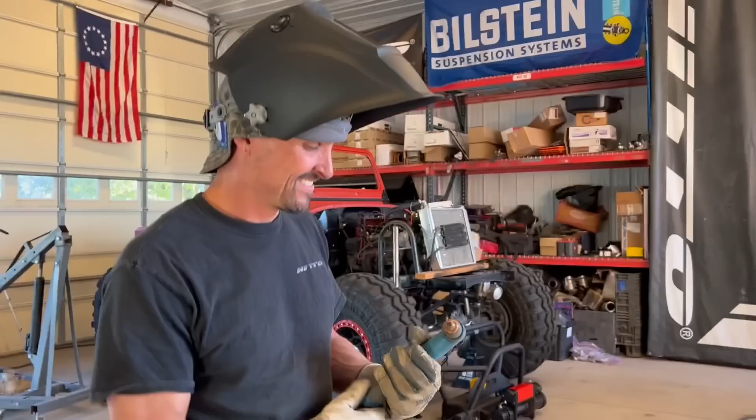Say hello. Hi, I'm letting him use the plasma cutter for once. I get to play with this toy. All right, ready? Here we go. See what you got. Under pressure. How did I do, Coach? I'll give you an A-. Because you didn't put your welding jacket on.

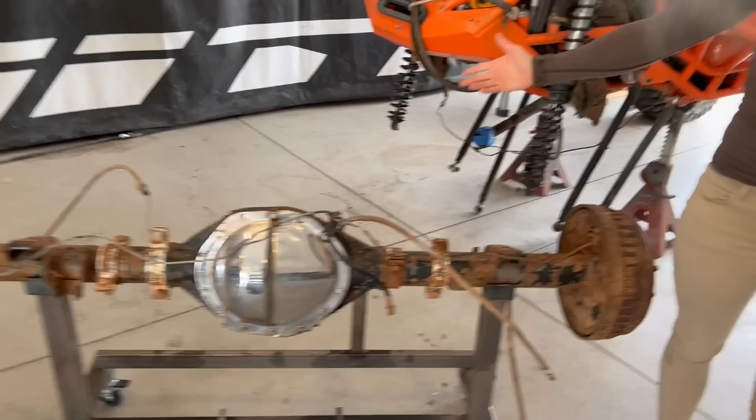Yeah, we were just supposed to fix the axles up a little bit, and we got into it, opened up the front axle, and the gears were in pretty rough shape. Like the teeth were chipped, and then we opened up the rear and it was full of mud, and we were just like, you know what? Let's just find some different ones. So Chris did his research, and we picked these up really close by, got a really good deal on them. The plan is to completely clean these up, put a truss on them, and make them look beautiful, throw them under the pebble bouncer.

One of the things John wanted to do is simplify this dash. All the old switches and the light switches, all the old stuff, we're gonna get rid of. Because I hate wiring but I'm really good at it, we're gonna do a Switch Pros, turning all of these switches into one Switch Pro. We're gonna clean up the dash, move some things around, put some of the gauges back in the middle. We're just gonna make this a lot cleaner and easier to use. So that's one of the things we're gonna get doing, and clean up all the wiring in here.

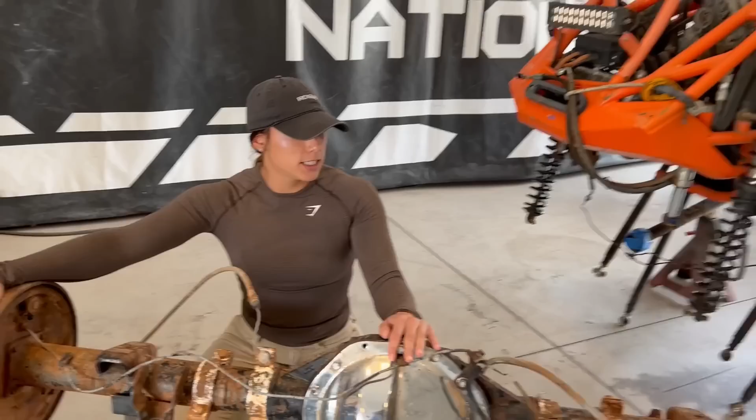While Chris is working on the CJ, I'm going to be tackling the pebble bouncer. Before, he had 1/4 ton axles, and those axles came with all these spacers, and it was one of the reasons he brought it to us, because we never want to see those again. Good news is, we did get the 1 tons, and they are 8 lug. What I'm gonna do next is cut all of these brackets off, completely clean it up, and get it ready for the Barnes 4-wheel drive truss kit.

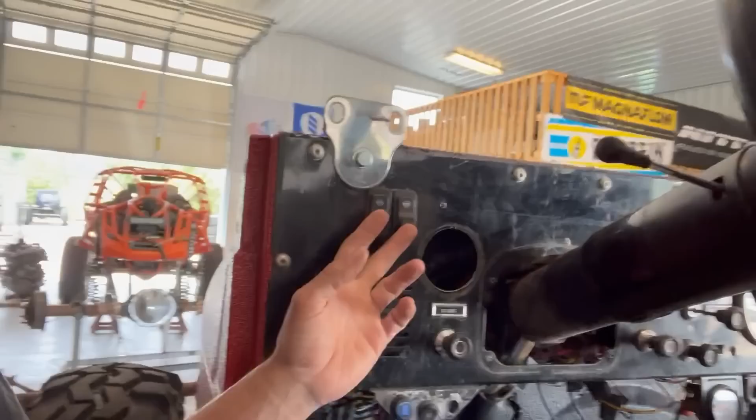So while we mock up this dash, I'm gonna cut it out of aluminum. We're gonna lose this dash. We are going to take the ARBs and put it in the Switch Pros, the lights put in the Switch Pro. I don't know what these are for, I'm pretty sure these are the bumper lights, which will be in the Switch Pro. All of the heat and AC controls, which we will upgrade also, we will be putting an AC system in here.

I'm not sure which one yet, I'm still trying to figure out which one will fit, so I'm still doing a little bit of research. But anyway, that'll fit inside the dash, so I'm not really worried about that part. The radio, we need to put a radio in there. We're gonna move all 3 of these gauges and put them next to each other like they're supposed to be, so that you can see everything all together. So the first thing we're gonna do is get this dash out and disconnected and see how bad the wiring is back there.

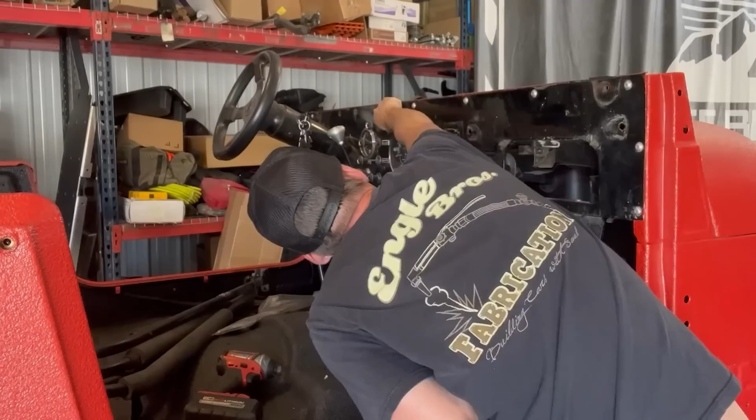Everybody out in the world, stop messing around. So I'm tearing this dash apart.

It's a nightmare, so we're tracking some stuff down. I do know that all of the ARB stuff, which is now down here, all of that will come out because that's all gonna go to the Switch Pros now, so that's cool. I have a black wire that I think is a positive wire, so that's cool.

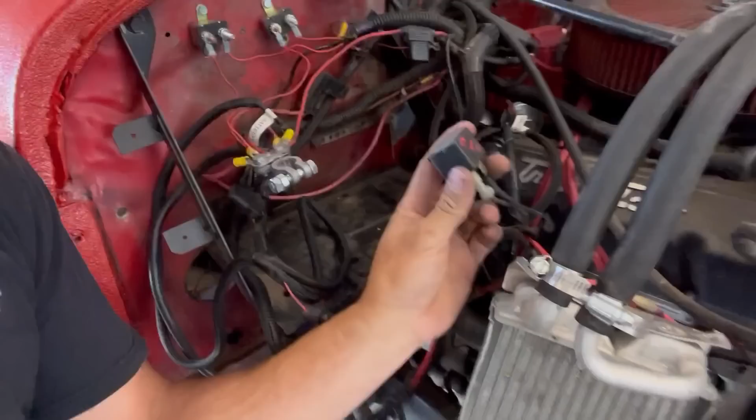We're finding some more stuff, so we're just gonna yank all this stuff out. On the passenger side, where all the battery stuff is, all of this is gonna go, so we're gonna try and decipher where all of it came from. I do know, and then this little guy, there's like this floating relay. It says fan, but let's find out.

So we're gonna rewire the fan, rewire all of the ARB stuff, get rid of all the relays and all this stuff because, you know, Switch Pros can handle all that by itself. So then I'm gonna take all this wiring out.

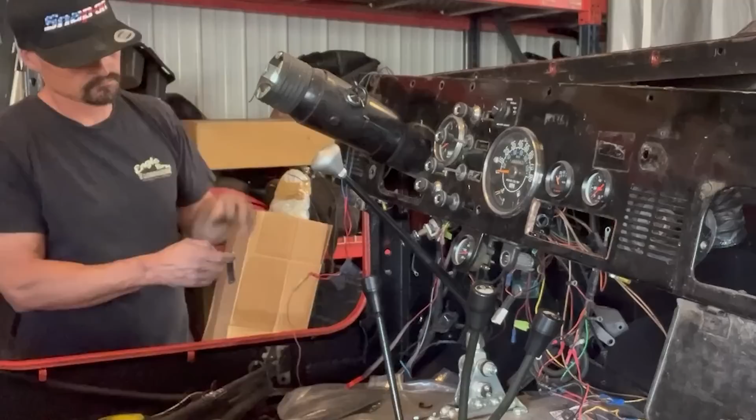All right, as you can see, we got it out. I took the old heater box out because we're not gonna use that. So now I just have to decipher all of that mess and clean it up, because there's a lot of stuff in there we don't need.

I'm gonna redo these speaker lines, so half of this will be gone. This is the old resistor for the fan resistor thingy-majigger, so all that wiring is gone, don't need any of that. All the lights and stuff for the old gauges, this can all go because I'm not going to use that.

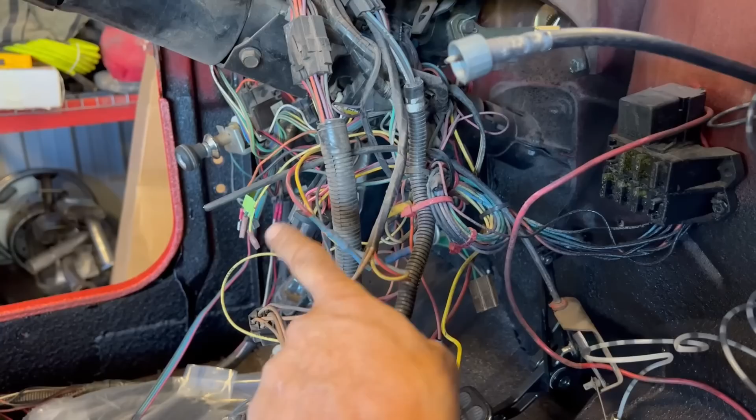I think I'm going to convert this to an electric or electronic oil temp sensor or oil pressure sensor. That we got to clean up, they kind of oversprayed onto that guy. Some of this is going to go away, so now I just got to go through there and figure out what everything is.

Also, we got all of the relays off of the firewall in here. This is the only cable that needs to run across here. I just need to loom this up and clean all this up.

I got rid of that big cable that came across here because all the ARB stuff is now out of here, since it'll go straight into the Switch Pros. We're gonna shorten all this stuff up. These are for, I don't know, the O2 sensors or something because this is injected. Reloom it, clean up the top of this engine bay, redo some of these.

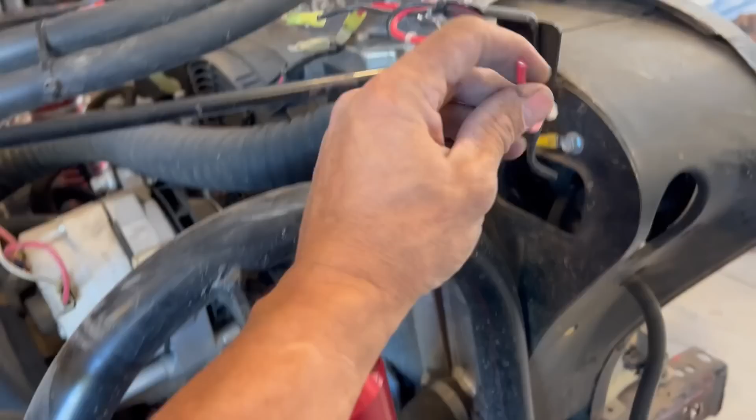I gotta redo the fan because the fan, that's what that one relay was, and it was burned, so they were having to jump the fan. So we'll have to put a real fan in there, and that is also controlled by that guy right there, so we'll have to get a new relay and stuff wired into that and get that fan running.

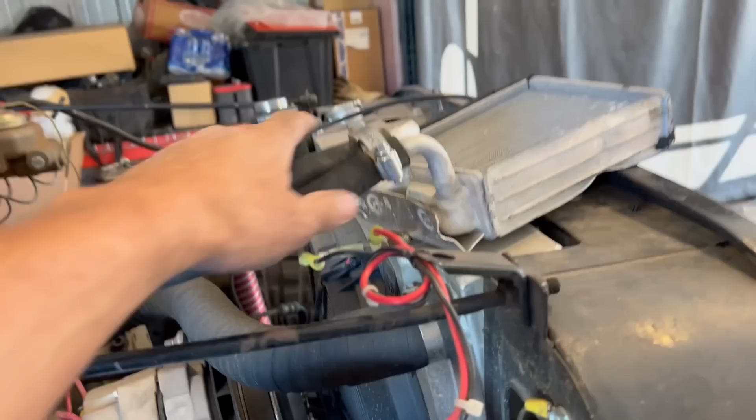This is gonna go to the new AC box that'll be in the firewall when we get it, but for now they just ran it like this because I don't know why, but hey, it works.

I was trying to take these nuts off, and as you can see, all of them are pretty mushroomed, like someone took a hammer to them. And like when this one was coming off, it was completely taking off the metal. And this one, I can't even get off right now. So what I'm gonna do is take the finger grinder and just clean up the edges and hope that it'll come right off afterwards.

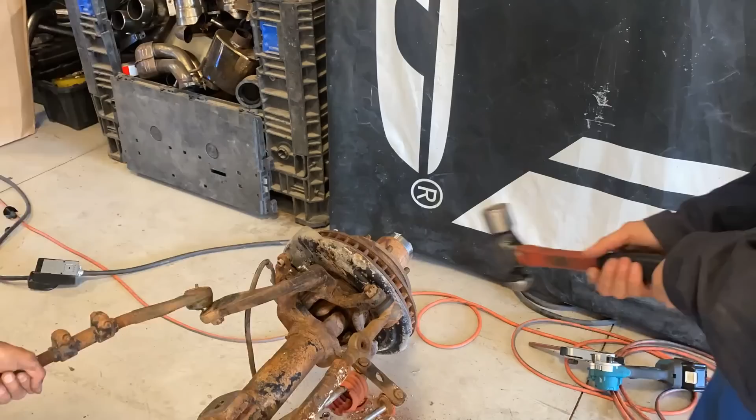After I was done going through that wiring, we took everything off of here that was important, and I'm starting to transfer it out into a layout of the new dash. Had to move some stuff over because stuff didn't fit in some spots, but this is what we're gonna pretty much end up with.

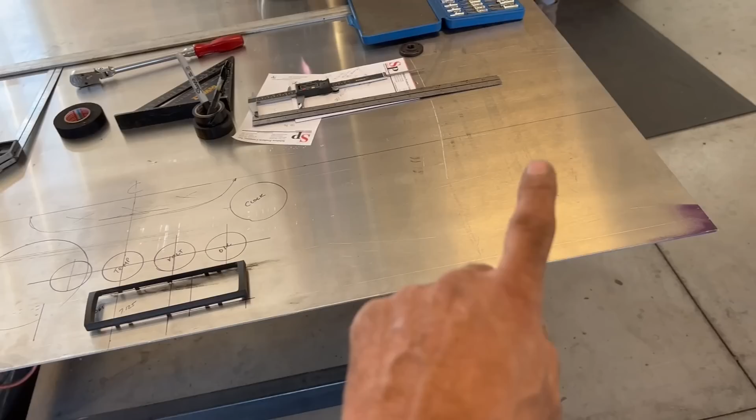We're gonna put a speaker over here. Glove box will be gone, we really don't want the glove box in here anymore.

There'll be a speaker here. I still gotta put turn signal LEDs in here.

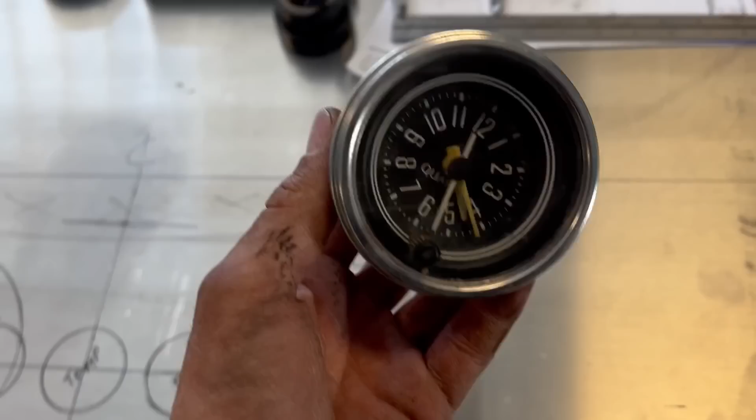This is the original cluster. Maybe, I don't know if we're gonna get rid of that because now we don't need all the gauges that were in it. I don't know yet. The tach, temp, volts, oil, and surprisingly enough, I got the original quartz clock and it actually works. Believe it or not, it works. I don't know how accurate it's gonna be over time, but it does work. And I'm gonna stick that back in the dash because that's pretty rad.

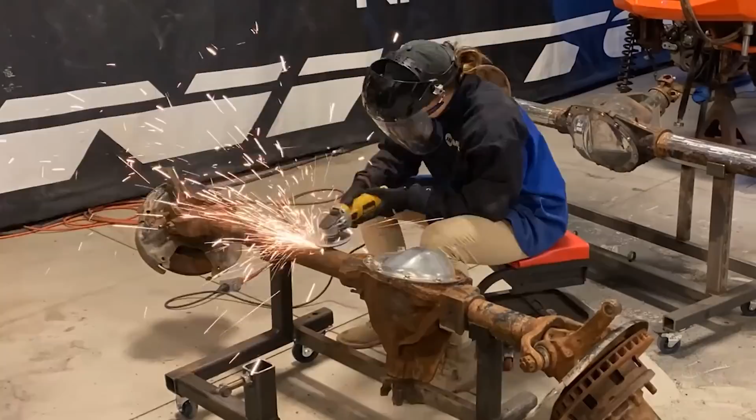So I did take the grill off because it is going to be painted in the same bullet liner color. And today we're just gonna start sticking on what we do have. I think we have a window frame, a tailgate, the rocker protectors slash rock sliders, and the rear bumper. So that's what we're gonna try to get on today.

Before we put the tailgate on, we wanted to touch up some of these miscellaneous brackets and make them look a little bit better. And John didn't want these to be silver anymore, so we're going black.

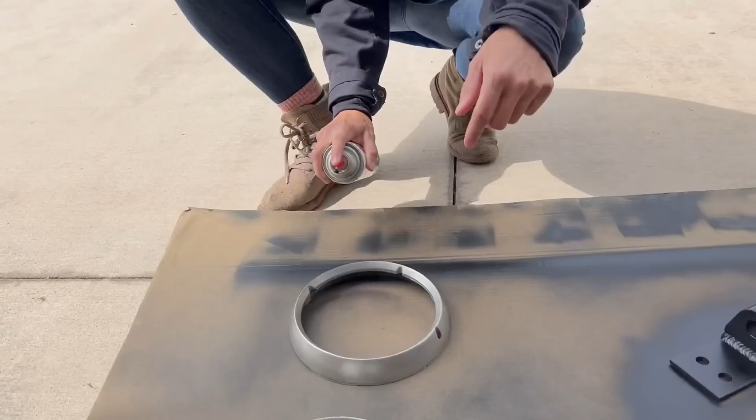Beck is a professional painter. She's really good at it. And I like it. What's funny is, growing up, my dad always had a joke that if we ever needed a job living out in the country, the horse farms, we could just paint the fences.

Worst came to worst. John also wanted to polish this tank up, so I'm gonna clean this tank real quick. Clean the overspray and the dirt and the years of grime and stuff on it, and probably hit it with the buffer real quick and see what happens. I don't want to make it too shiny. We'll just see what happens.

There's a lot of grit and dirt and grime on this from over the years. So I'm just gonna Scotch-Brite it, hit it with some acetone, and see if we can get this thing to polish up a little bit.

So Beck and I got pretty far on the CJ. Now we're gonna shift gears because we're waiting on some parts for the CJ. We're gonna shift gears back onto the bouncer. So we got a little bit of work to do on the bouncer. That's what we're gonna do now.

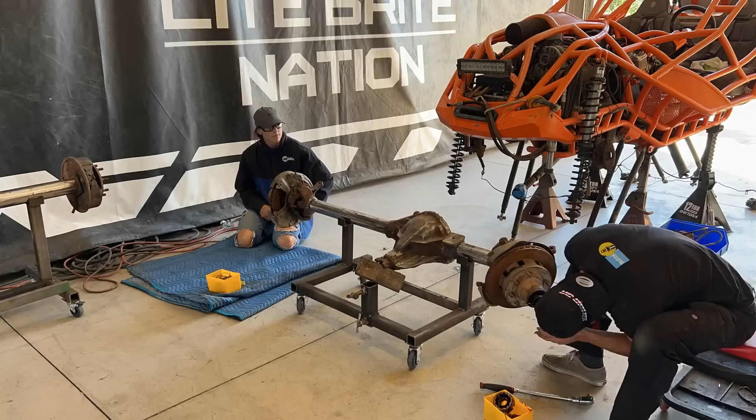Now we replace some ball joints.

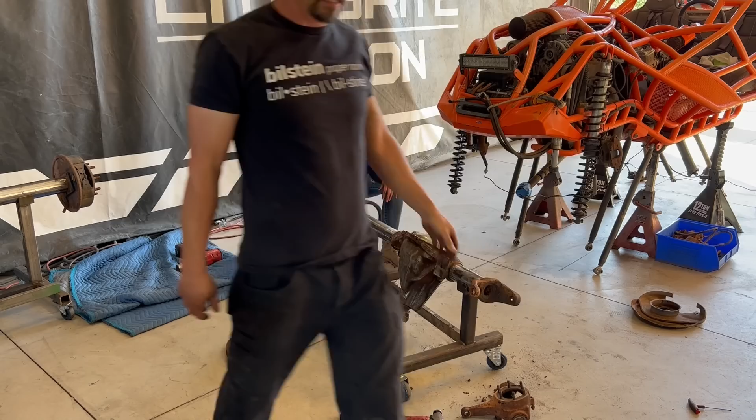Last night I got these parts sandblasted, and today I'm going to primer them and paint them. And while Beck gets those parts all painted up, I'm gonna strip this firewall back so that we can paint this firewall, because let's be honest, it looks pretty bad.

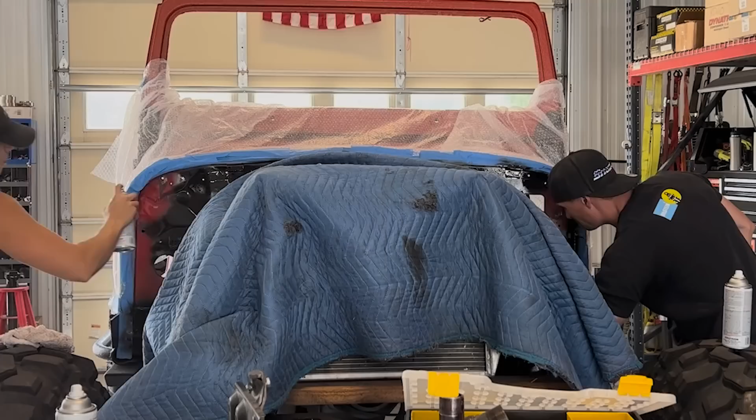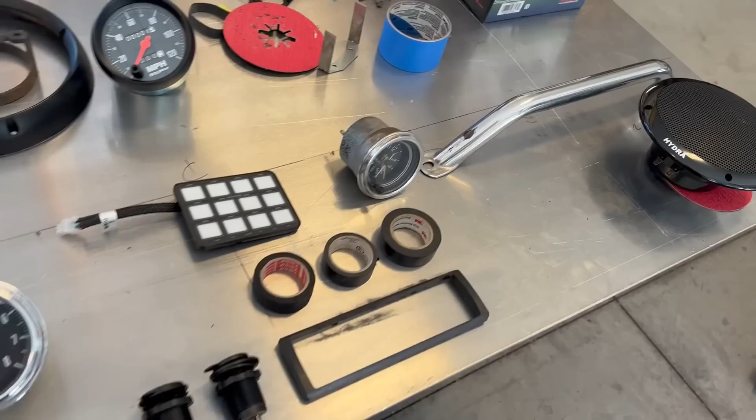So here's the new dash layout of the CJ. I got them new speakers. These are marine Pyles - I know they're not super high end, but they are waterproof so we can put these in the dash without having to worry about having the top on them. They can get wet, and they've got a nice screen on them. That's all I really wanted.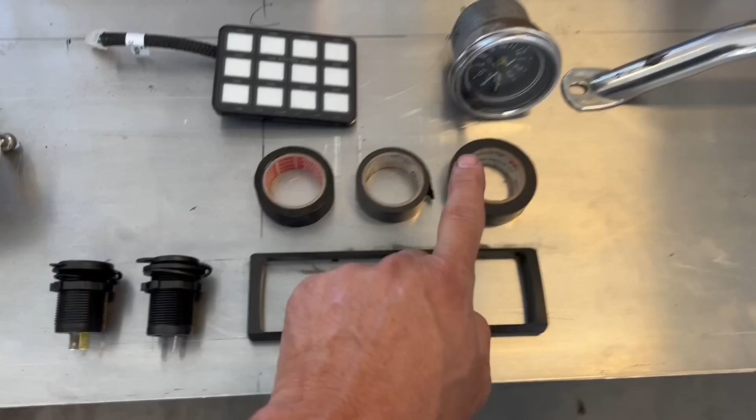We're gonna put 4 gauges across here, not 3, because I needed a fuel gauge, so there'll be a fuel gauge here. Speedometer, which just came in, it's an Auto Meter, so we'll put a speedometer here. I have a new RPM gauge coming, it's the same series as this so it'll match. Actually, all these gauges will all match - they're all the Z series from Auto Meter.

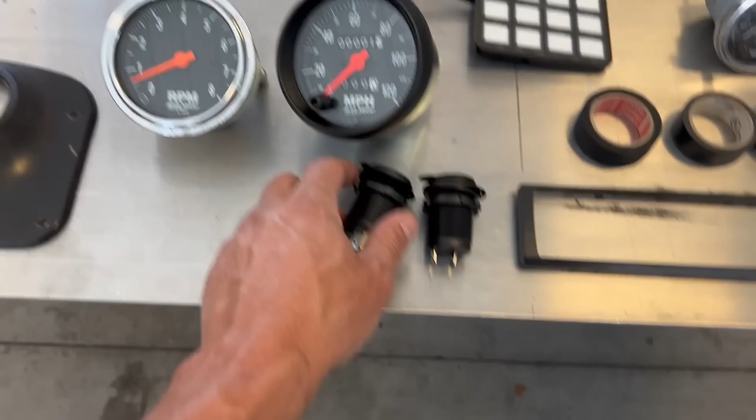Kevin's making noise, haha. I got these two - I got a USB, the 3.0 USB, so it'll be a quick charge. So I have that, and then I have a regular input, auxiliary power for whatever else he wants to run, steering column, and then one more speaker will go right here. And then we'll cut this whole thing out and get it all bent up.

Switch pros, 12 button switch pros will go somewhere in this vicinity. And an original quartz clock out of this CJ - I'm gonna throw this nice vintage piece back in here and make it work because I think it's sick.

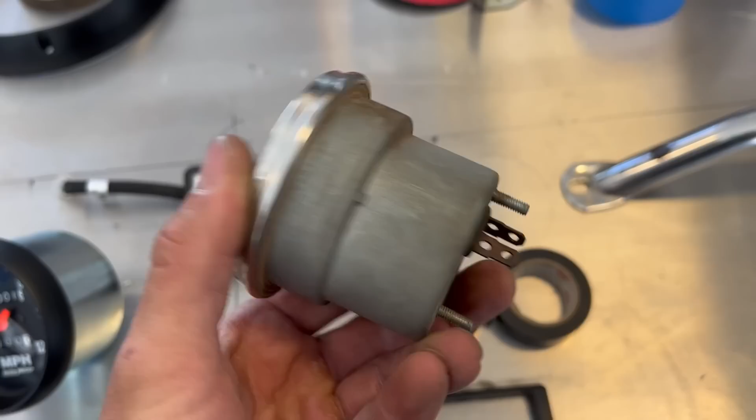So I'm gonna get to plotting one more time and actually get some lines drawn out and some circles and stuff. The grab handle, this factory grab handle in here. So yeah, let me get to cutting.

Back to getting everything prepped for paint. There's a couple of things we're gonna paint orange.

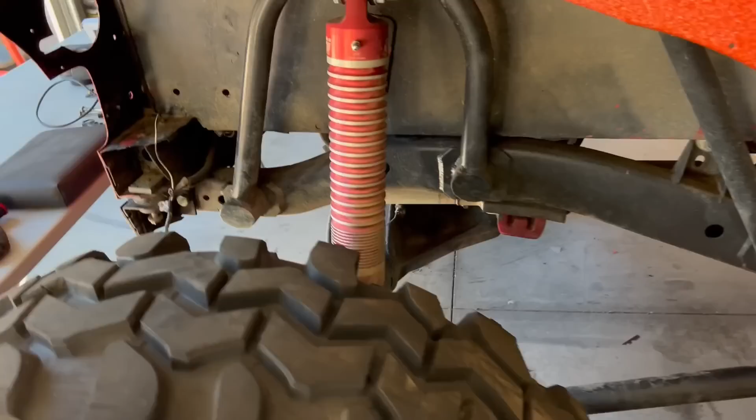We're gonna paint the center armrest console. He wants the ORIs painted orange, so we'll take these off, scuff them up, and paint them orange. Bead lock rings will be orange, the cage that holds the tank down will be orange. Touch up the links, then black seats, orange belts, and the orange cage on it. That'll be pretty sweet.

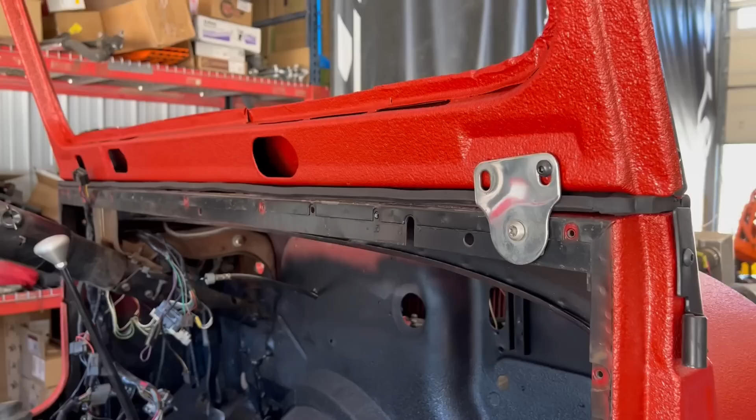The dash will be black with all new layout, and a bunch of black hardware. This thing should be pretty sweet.

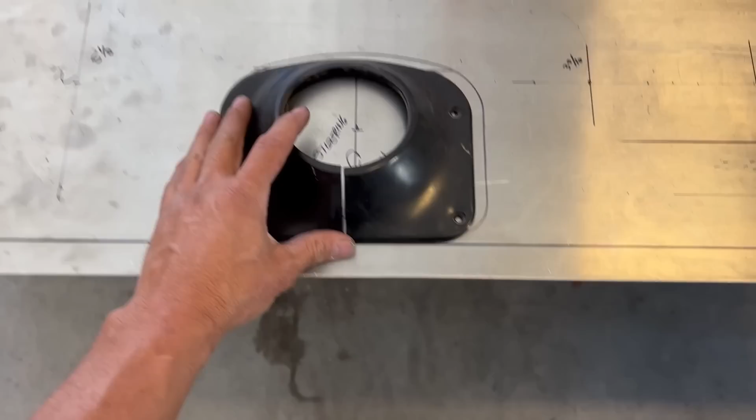All right, so we got everything laid out. We're gonna have the speaker right here. I need a 5 1/8 hole centered from here, I need to cut this guy out. The steering wheel trim and steering column trim will fit around it. I have 2 gauges, RPM and speed, both 3 5/16 hole saws.

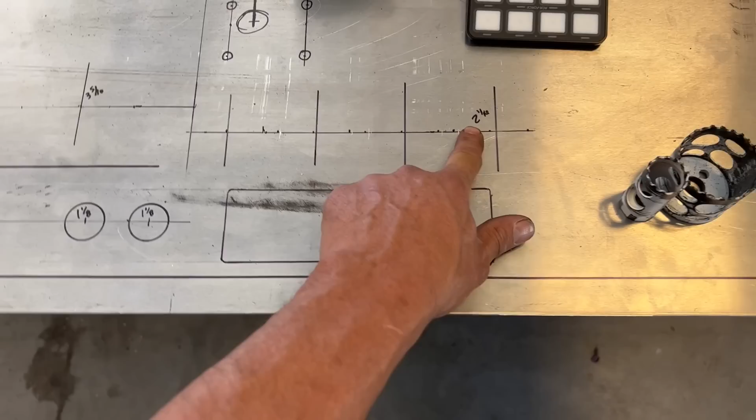Beck actually just ran up to the hardware store to get me this hole saw because I don't have one. I do have these, these are 1 1/8, for the 2 USB and auxiliary power, and then 4 of the same gauges, 2 1/16 for fuel, volt, oil pressure, water temp, or probably not in that order, but you get it. So that guy goes right there.

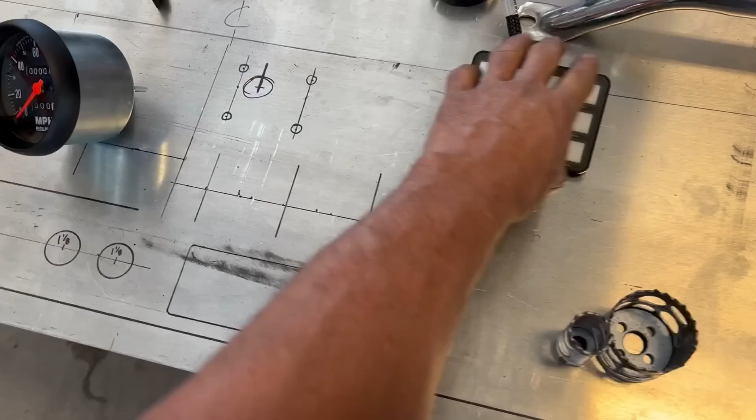This is for the switch pros, so this guy will go right here, almost to dead center. This is the center of the dash, and that's as close as I can get it to center. So we're gonna go right there. This will be the radio.

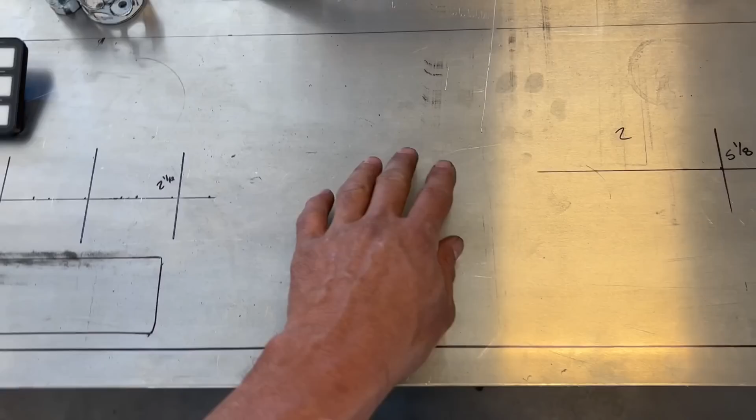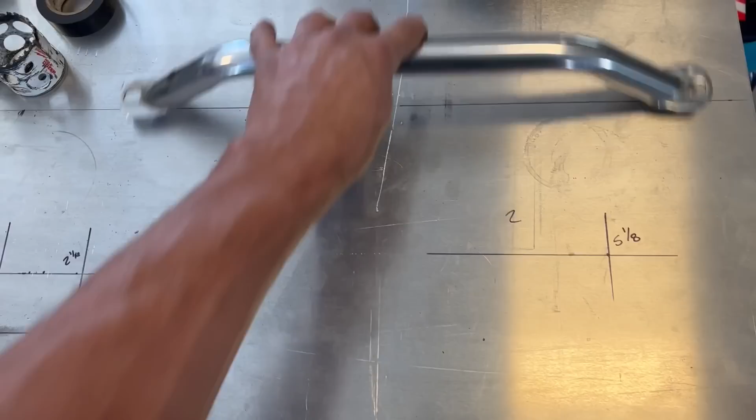The other speaker, we'll probably put some sort of pocket here, but I won't put it in the dash. I don't think I'm gonna put an actual glove box back in it. I think what I might do is a MOLLE pack or something like that, so I might cut something here so you can hang a MOLLE pack on it. But this is gonna be the one speaker, and I haven't quite figured out exactly where I want this to go. It's probably gonna go up here somewhere, the grab handle. And that's it.

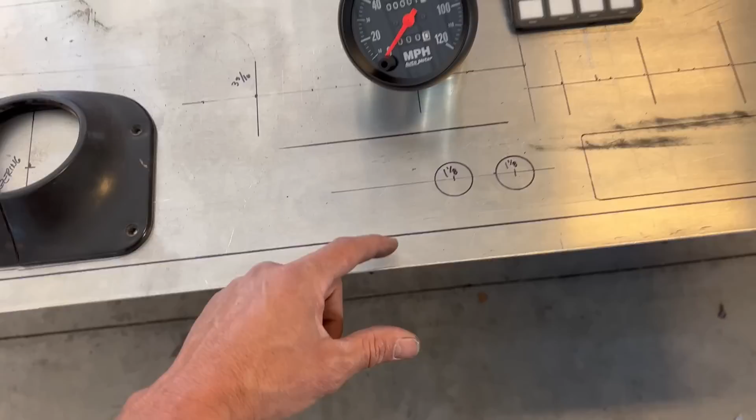And then in the future, I don't know what we're gonna put here. I was gonna put AC here, but we are gonna go with an under dash unit and not an in-dash unit because I don't quite have the space, if the gauges and everything are in here, to run a behind the dash full AC unit. So I'm gonna run an under dash, and we have a lot of room under the dash, so that's what we'll probably run with. I think it'll look great.

Everything's black because he wanted a black face and black rings, so I had to order all new gauges, and this is what we came up with. We do wanna do something with this, he doesn't like the chrome. Maybe we'll powder coat it or something, because that's the only piece of chrome on the inside. But for now, we're just gonna get this cut out.

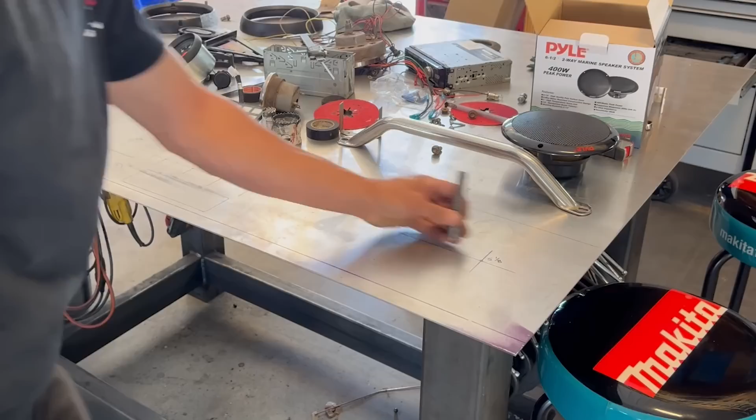So I know I've said it before, but wax will help cut aluminum.

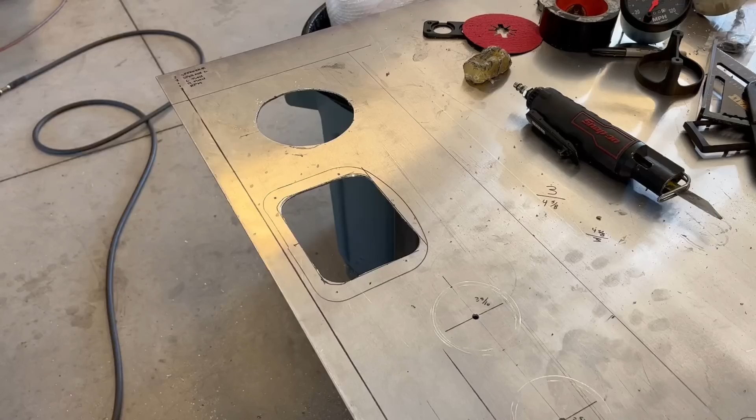Is he talking to you? Come here. Come here, Pecker. Come here, buddy. You saying thank you? Here. Here, one more. One more here. Well, he's got 2 over there.

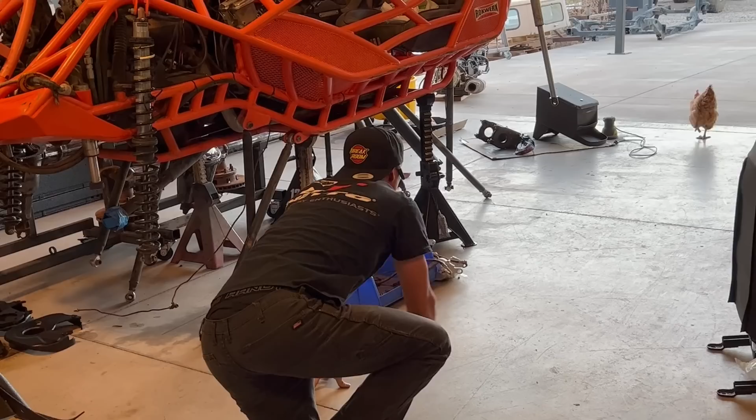So we got all the holes cut out. There's actually holes under here, yep, right there, bam, and they fit. So this is the top side, this is the face, this is the face of the dash.

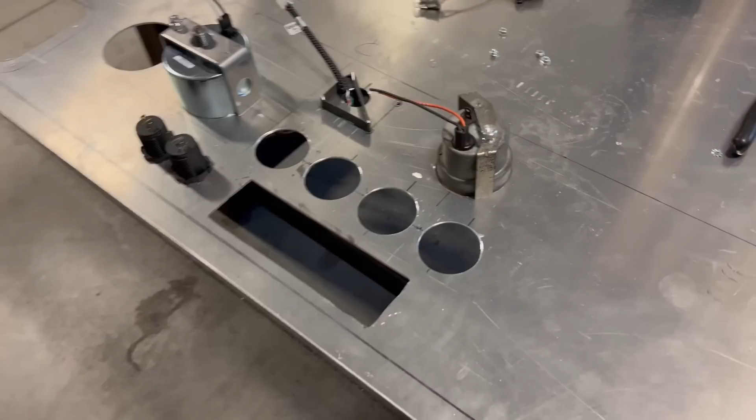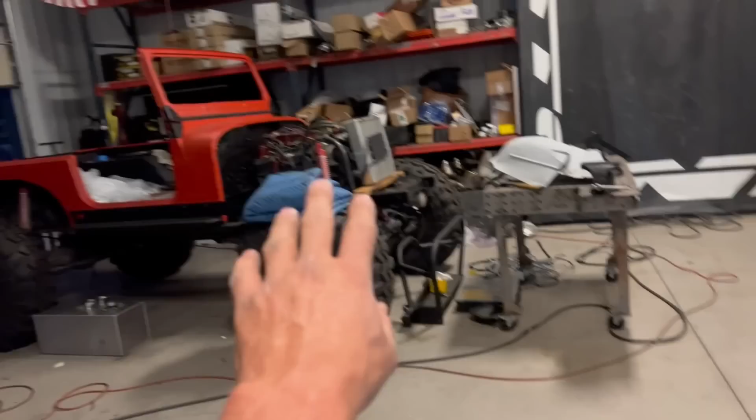But now it is time to wire all this up because I'm gonna do something a little different on this dash. Instead of everything having a plug and then having to plug it into the dash, what we're gonna do on this one is run all these accessories: a left and right speaker, all the power and grounds for all the lights, all the power to power everything except the radio because it has its own plug. But the USBs and everything, the speedometer, the RPM gauge, the tach wire and everything that comes out of that, and the speaker wires, because they're physically attached to this dash, we are going to run a harness. I'm going to create a harness that's going to pick up all of these, including turn signals.

There'll be a left and a right turn signal and a center warning light. This right here will plug into that, but this plug will be part of the dash. So this will come out of the dash here, come out of here, and then plug into the Jeep. So this will be one plug.

There'll be a second plug that'll have the speaker wires and everything else that's going to be an accessory on this dash, so you can install this dash and just plug it in. The reason I'm doing that is because we all know how hard it is to pull a dash. If you saw me pull this dash, I had to get under there and unplug every individual thing because it was tied to the Jeep, which makes removing the dash really hard.

I want to try to keep it really clean under the dash, so the dash will have its own harness over to the driver's side and then just plug in. I can run all of the harness under the driver's side and against the firewall, so there'll be no wires under there, except for the radio. The radio will have its own power and everything, but it sticks far enough in there, and you can just reach under there and unplug it. Easy. So let's get started.

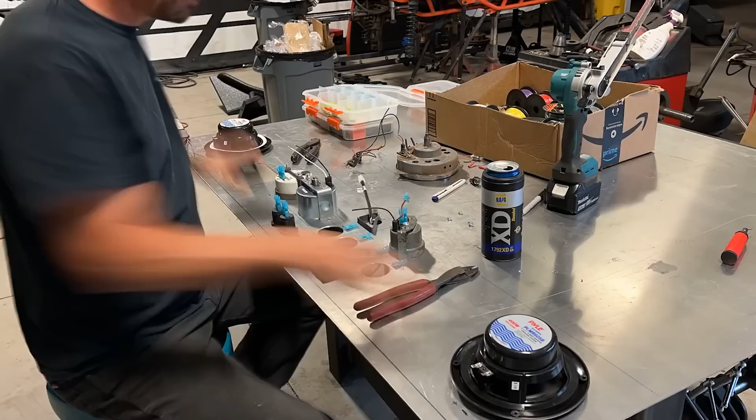All right, so as you can see, I have a couple of circuits already ran. I have Illum and all the grounds ran. I have a tach because it was already in there. But what I did is I am going to incorporate the radio into this harness because I already have power, I already have grounds, I already have ignition, and then the front two speakers.

The only thing that will not be in this is the two rear speakers, which I figure would be easier to put a connector here to run all the way over here for the two rear speakers. So that's what we're gonna do. That way we don't have to worry about anything in this dash. We'll just have one connector over here that'll have all the extra stuff on it. I'm not sure what it is yet. I know it's a left and a right rear. I don't know what else will be in here yet, but this is how it is coming along.

So guess what just showed up? All the rest of the gauges. So now I can finish beautifying this section right here because there's a lot of mess in here.

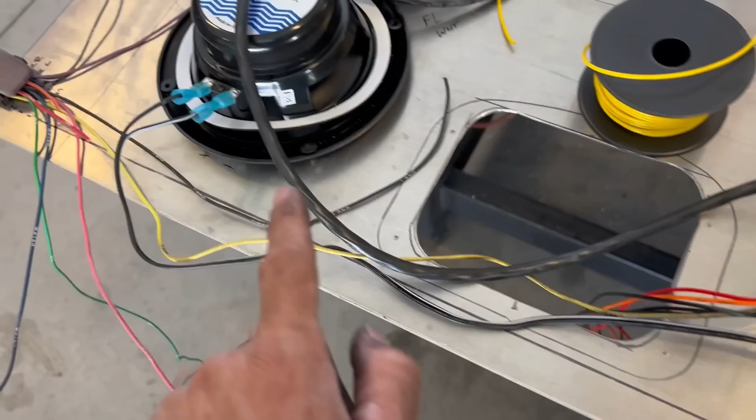That's what we're doing. I got the SwitchPros plugged in and cut. So I'm gonna put another connector here so that it's with this one. Still gotta run two sets of speaker wires, left and right rear, to a plug over here, and then run these three sensors back up, which is oil pressure, water temperature, and fuel level. But I needed to know how they connect. So let's get these things open and in.

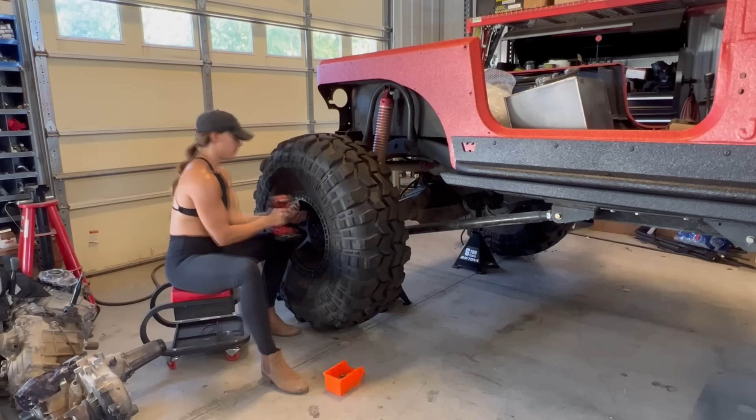So I took John's beadlock rings off, and now I'm going to sandblast them and get them ready for paint.

There's a snake in my poop.

All right, guys, I know, more wiring, but we're almost done. We got three more things to do.

All right, so before I forget to do this again, because I already forgot to do it once, the first time, we are mixing up some paint. So I got my gun here, and no, it's not a Harbor Freight gun. It's actually a really good gun. Ooh, it's a nice Iwata gun, gravity feed. I may or may not have already done some stuff, which you will see right now.

And now I'm gonna go for round 2 because I don't have enough room back here. Made this cool little paint booth out of the back of the shop. It actually works very, very well. We didn't get anything on the concrete floor or anything else or the walls or anything.

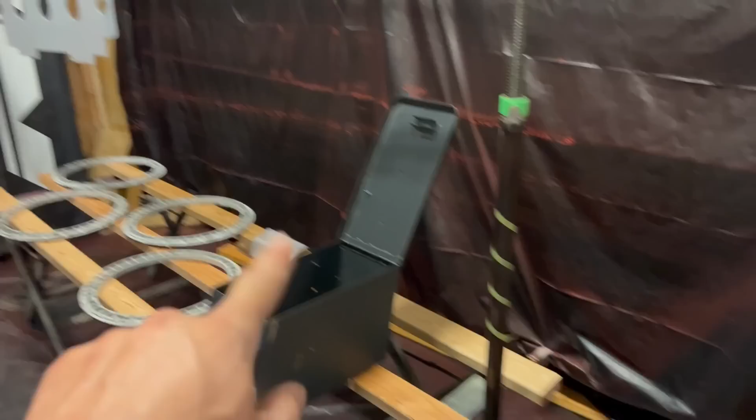So I have the beadlock rings left, the center console. We're gonna paint the whole center console, the bottom of the fuel cell holder thingamajigger, the winch plate cover, the top plate for the winch. You'll see it when it all comes together, but right now we're gonna shoot this orange, and then I gotta whip up some clear and shoot this stuff clear. I'll show you everything when it's done.

I don't know if you can see it, but man, look at that gold. There's some gold flake in there. Oh, it's so pretty. I mean, I'm not a huge orange fan, but man, look at the shimmer in that.

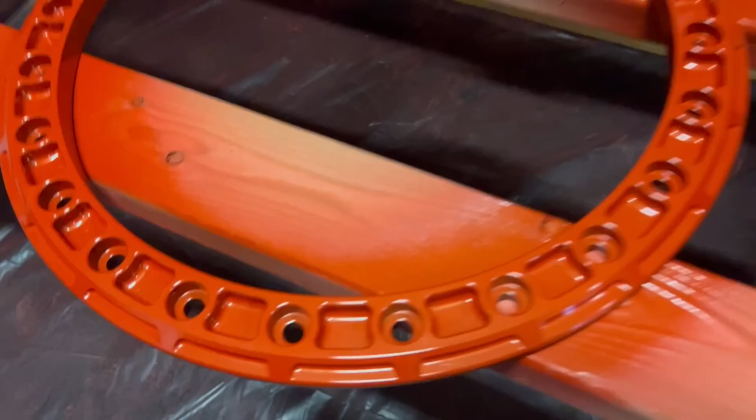Woo! Let's get it painted. All right, there she is. Look at that, no runs. It's like I've done this before. Mind you, I haven't done this in about 3.5 years, but yeah, she came out pretty good. Pretty excited. Look at that sheen.

Oh my God, this is actually a pretty neat color. I mean, I'm not gonna lie, I didn't like it at first, but I'm not an orange fan, but geez, this color's pretty sick.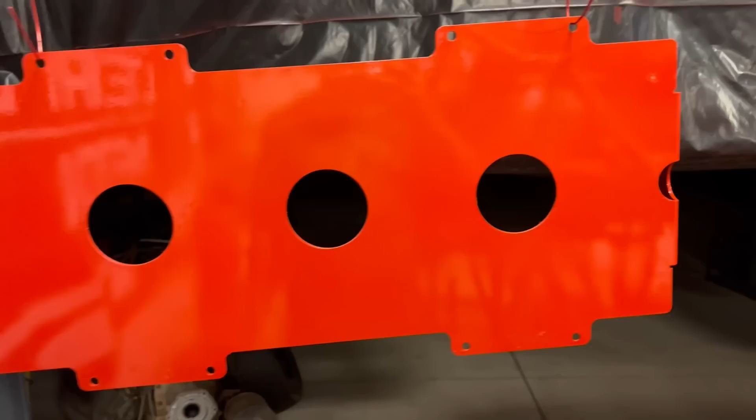Can't wait to get it all put back together. Earlier today I got the dash 99% wired. I gotta put 2 connectors on the ends. I got some footwell lighting in the bottom of the dash, and I got the blinkers wired up. Just need to cut this thing out and go get it bent. We'll put one bend right at the bottom, then get this thing ready to get painted. So tomorrow we're gonna paint a lot of black.

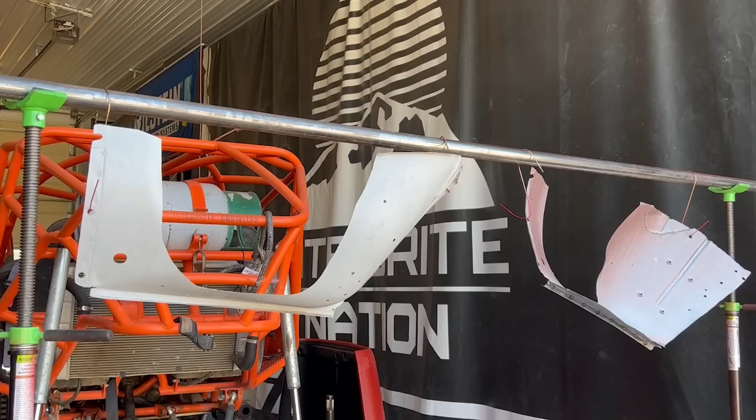Shoo-wee! Look at that paint job Chris did. Looks wonderful. All right, time to put them on.

Chris Payne. Say hello. Hi. I'm letting him use the plasma cutter for once. I get to play with this toy. All right, ready? Here we go. See what you got. Under pressure.

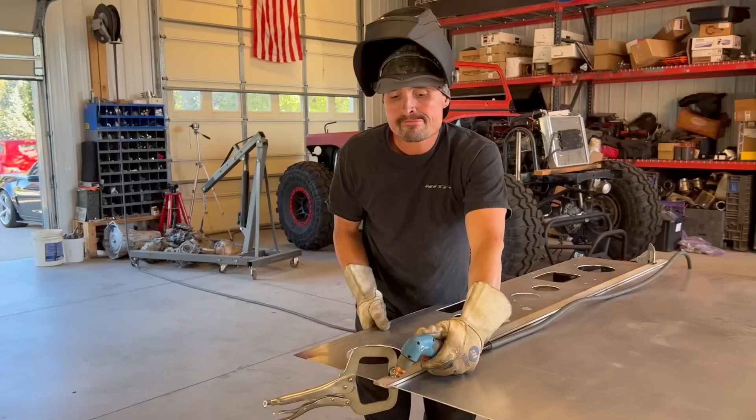How'd I do, Coach? Let's check it out. That's where I stop. Looks good. Thanks, Coach. I'll give you an A-minus, because you didn't put your welding jacket on. But other than that, you did good.

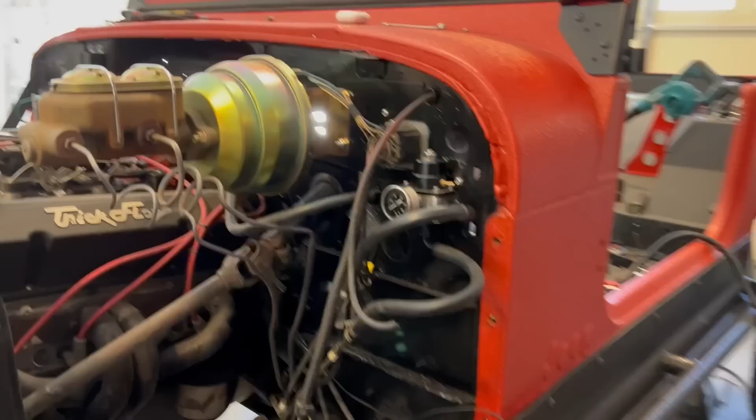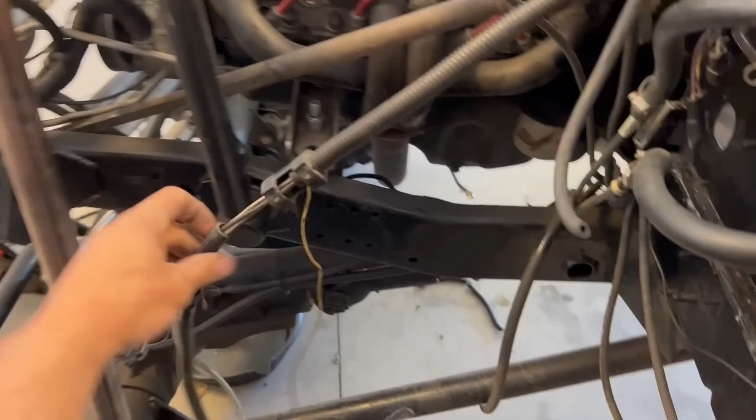So not only am I on puppy duty today, Beck is out puppy sitting for a friend of hers today too, so we're both puppy sitting. But I'm gonna finish up some wiring on the Jeep today. I'm starting to get things mounted and routed. Even though it looks like a complete mess with stuff everywhere, I know where all this is going, and I'm laying it all out, connecting the sensors and moving some stuff around. The plug wires are rerouted and cleaned up on this side, not so much on the other side yet, although it's starting to come together. I have the fuel pressure regulator mounted, and I'm gonna change these hoses. I still gotta redo the plug wires on this side and get some more stuff wired. We already cut out a bunch of stuff out of this harness that doesn't need to be there. This is gonna go down the fender because it all goes to the front. I'm starting to get this side figured out. I had to take the clutch pedal out of here along with all the linkages, and then we'll get that dash put back in.

So we still need a windshield, so we'll get that this week.